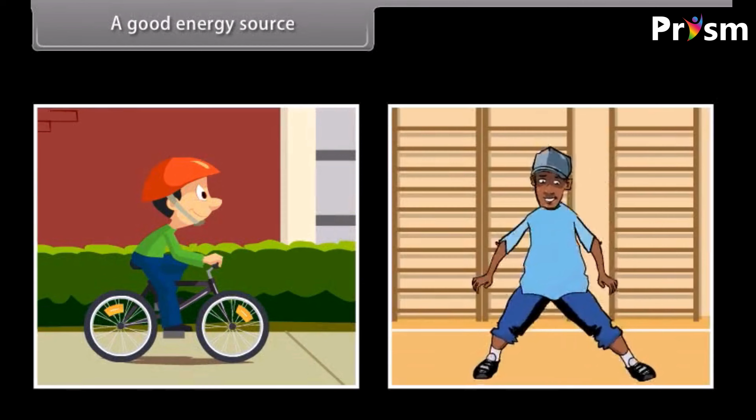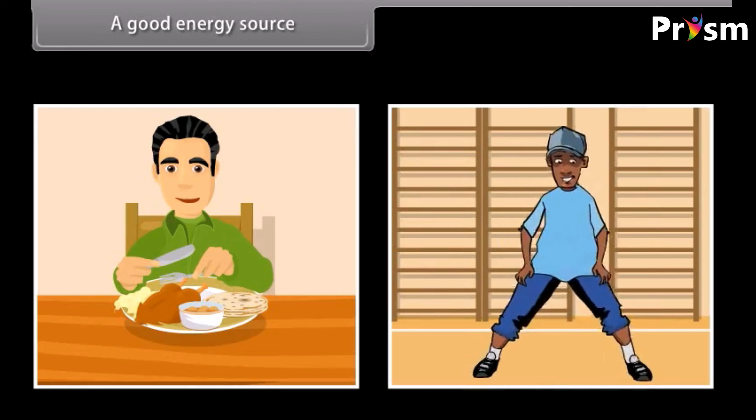A good energy source: in your day-to-day life, you need a lot of energy throughout the day. All physical activities that you perform require energy. This energy comes from a source that would give you the required energy to perform any activity. You need to keep in mind that any good energy source must assist you in performing a large volume of work, be easily available, be easy to store and move from one location to another, and be affordable.

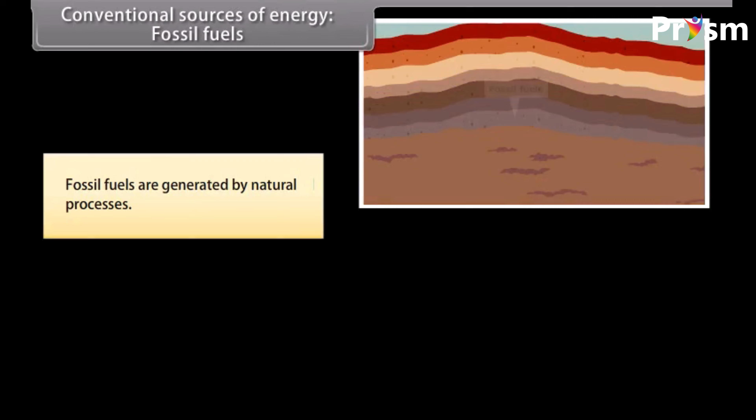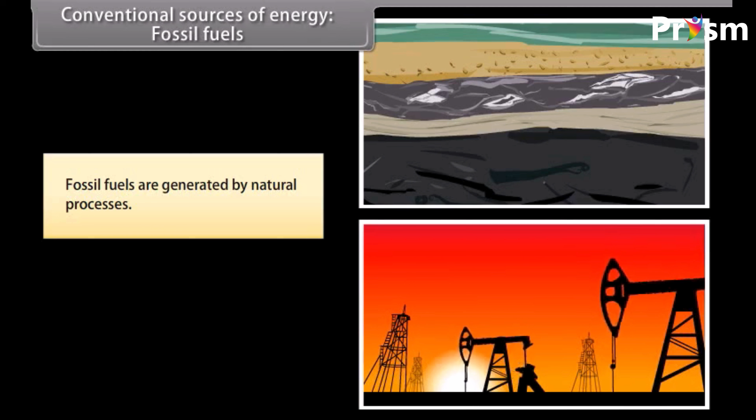Conventional sources of energy: fossil fuels. Fossil fuels are generated by natural processes. They include a high percentage of carbon. These are non-renewable sources of energy as they take millions of years to form. The reserves of these fuels are reducing at an alarming rate. The types of fossil fuels are coal, petroleum, natural gas, and heavy crude oil.

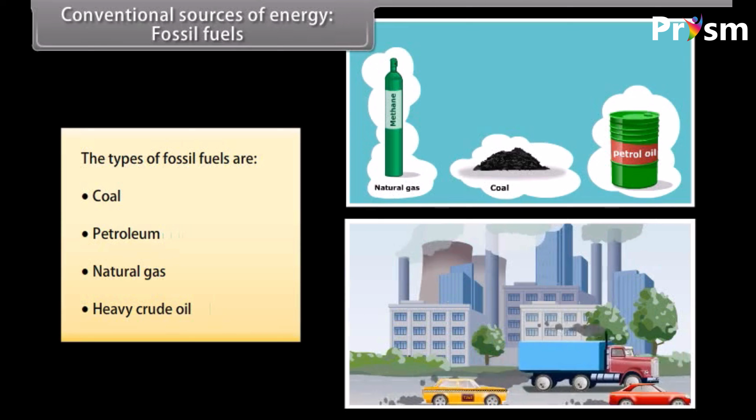Conventional sources of energy: thermal power plants. A thermal power plant is an industry where energy is generated by steam. Here, water is heated and then turned into steam. This in turn spins a steam turbine, driving an electrical generator. After it passes through the turbine, the steam is condensed in a condenser and recycled to where it was heated.

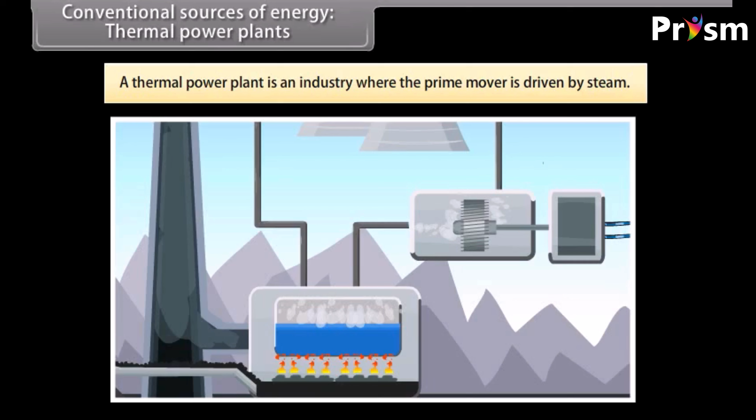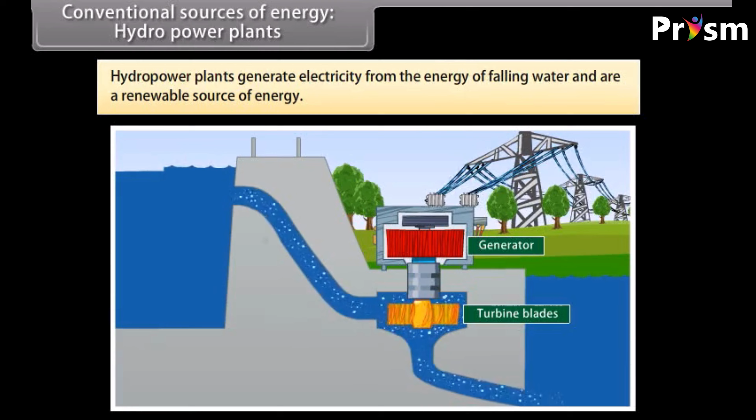Conventional sources of energy: hydropower plants. Hydropower plants generate electricity from the energy of falling water. Hydropower is a renewable source of energy. The advantages of hydroelectricity are: the cost of hydroelectricity is low, hydroelectric power supply is more suitable for industrial applications, and no carbon dioxide is produced as no fossil fuels are burnt.

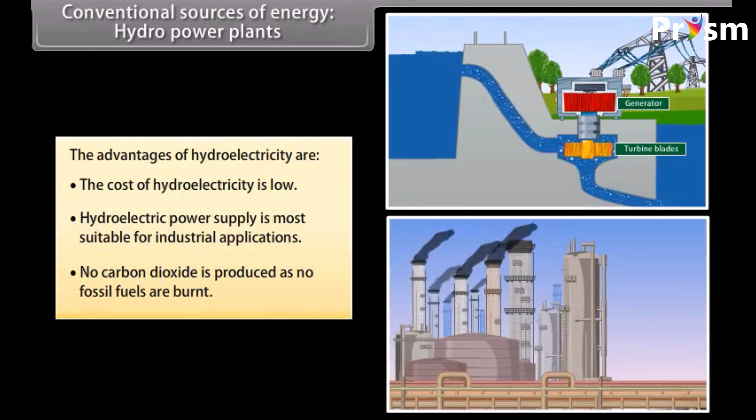Did you know? Burning fossil fuels generates around 21.3 billion tons, or 21.3 gigatons, of carbon dioxide (CO2) per year. Natural processes can only absorb about half of that amount. As you can see, there is a net increase of 10.65 billion tons of atmospheric carbon dioxide per year.

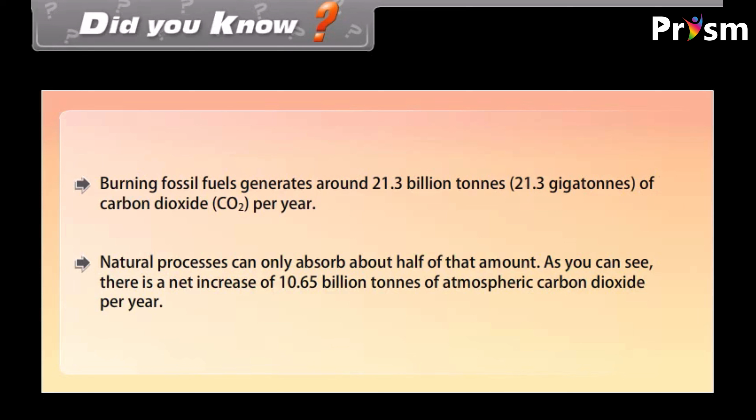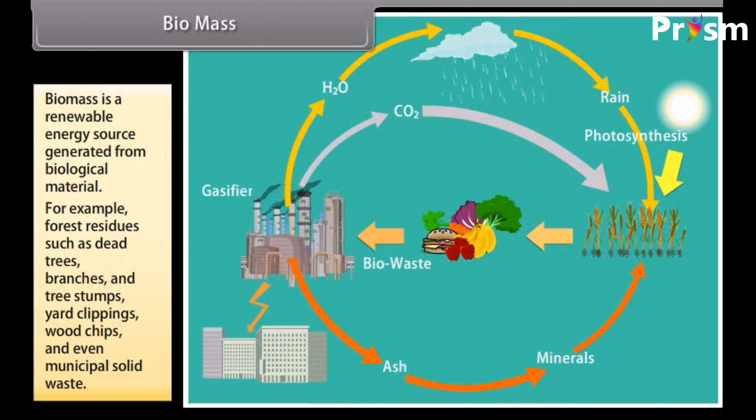Biomass is a renewable energy source and is generated from biological material that is derived from living or recently living organisms. As an energy source, it is either used directly or converted into other energy products such as biofuel. For example, forest residues such as dead trees, branches and tree stumps, yard clippings, wood chips, and even municipal solid waste. Biomass also includes plant or animal matter that can be converted into fibers or other industrial chemicals.

Wind energy: wind power is the conversion of wind energy into a useful form of energy, using wind turbines to make electricity, windmills for mechanical power, wind pumps for water pumping or drainage, or sails to propel ships.

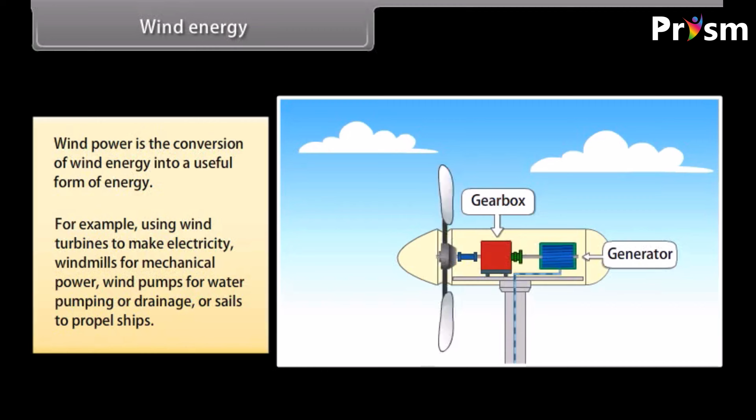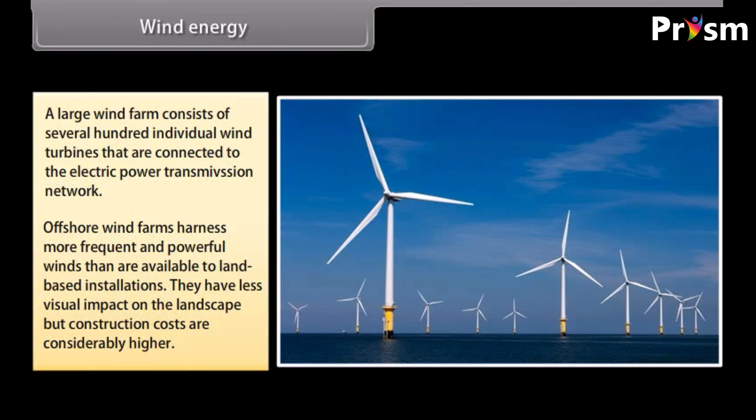A large wind farm consists of several hundred individual wind turbines connected to the electric power transmission network. Offshore wind farms harness more frequent and powerful winds than are available to land-based installations. They have less visual impact on the landscape, but construction costs are considerably higher. Small onshore wind facilities provide electricity to isolated locations, and utility companies increasingly buy back surplus electricity produced by small domestic wind turbines.

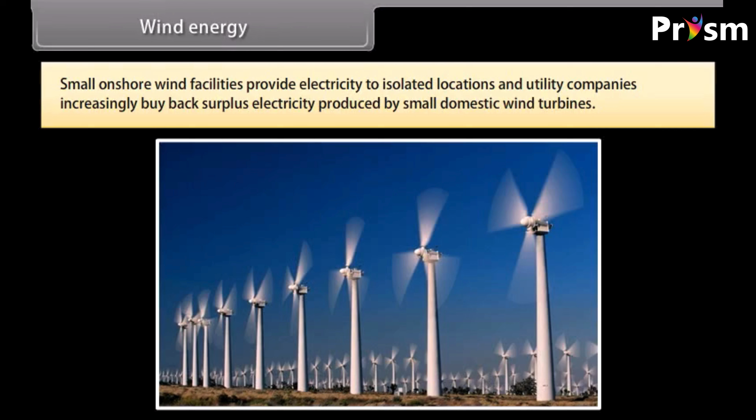Did you know? All large wind turbines have the same design: a horizontal axis wind turbine with an upwind rotor with 3 blades, attached to a nacelle on top of a tall tubular tower. In a wind farm, individual turbines are interconnected with a medium voltage power collection system and communications network. At a substation, this medium voltage electric current is increased in voltage with the transformer for connecting to the high voltage electric power transmission system.

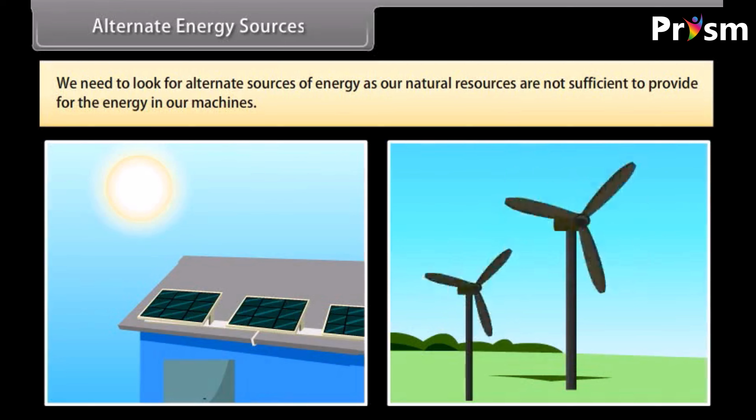Alternate energy sources: as we progressed, our day-to-day life activities also changed. We now get most of our work done by machines. Due to this, we need to look for alternate sources of energy, as our natural resources are not sufficient to provide for the energy in our machines. Examples include solar energy, energy from the sea, geothermal energy, and nuclear energy.

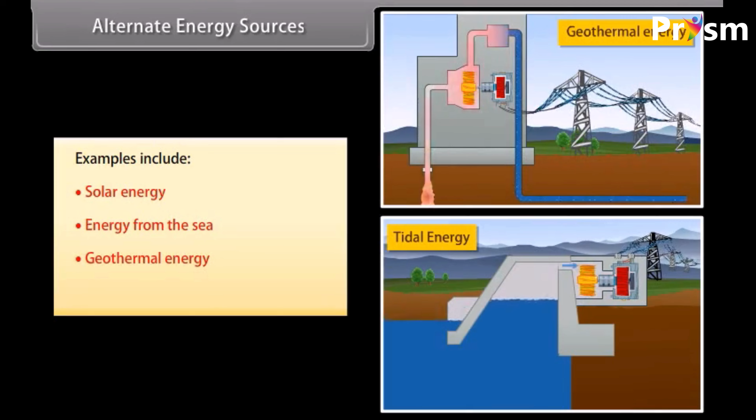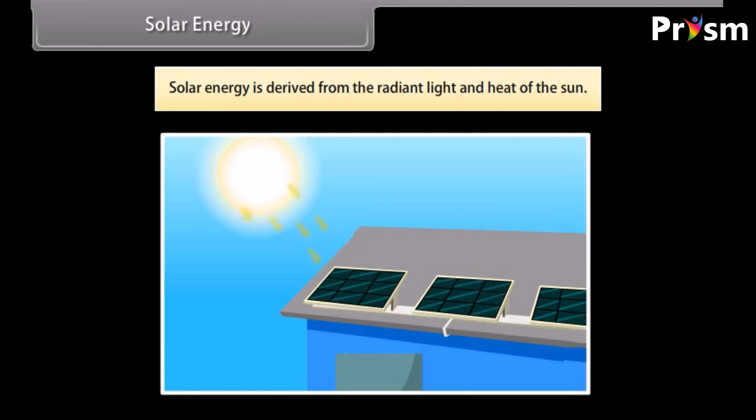Solar energy is derived from the radiant light and heat of the sun. It has been used by humans since ancient times for a range of technologies. Solar energy is used for architecture and urban buildings. It is also used for heating water in our day-to-day life, where solar hot water systems use sunlight to heat water.

In low geographical latitudes, domestic hot water usage is provided for with temperatures up to 60 degrees Celsius by solar heating systems. The most common types of solar water heaters are evacuated tube collectors and glazed flat plate collectors, generally used for domestic hot water, and unglazed plastic collectors used mainly to heat swimming pools.

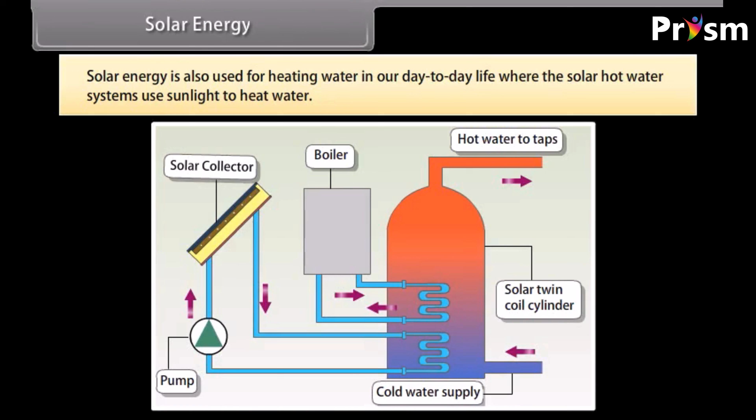Energy from the sea: tidal energy. Tidal energy is a form of hydropower that converts the energy of tides into electricity. This is a renewable source of energy, extracted from the oceanic tides.

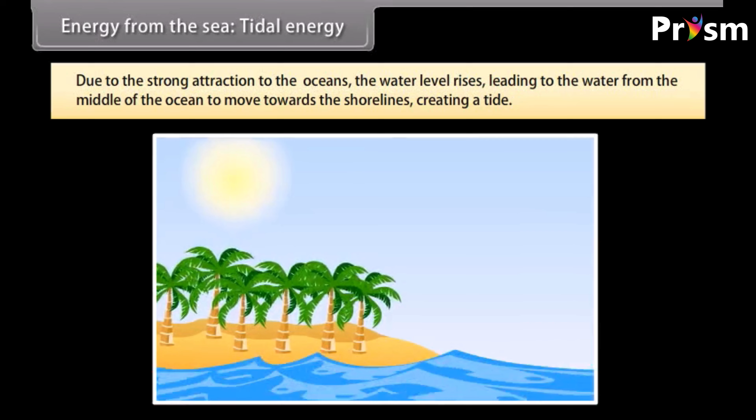Tidal forces are periodic variations in gravitational attraction exerted by the moon. This force creates motions or currents in the oceans. Due to the strong attraction to the oceans, the water level rises, leading the water from the middle of the ocean to move towards the shorelines, creating a tide. This is an unfailing occurrence due to the consistent pattern of the moon's orbit around the Earth.

The energy generated by the tide is saved by constructing a dam on a narrow opening to the sea. A turbine is then fixed at the opening of the dam that converts this tidal energy to electricity.

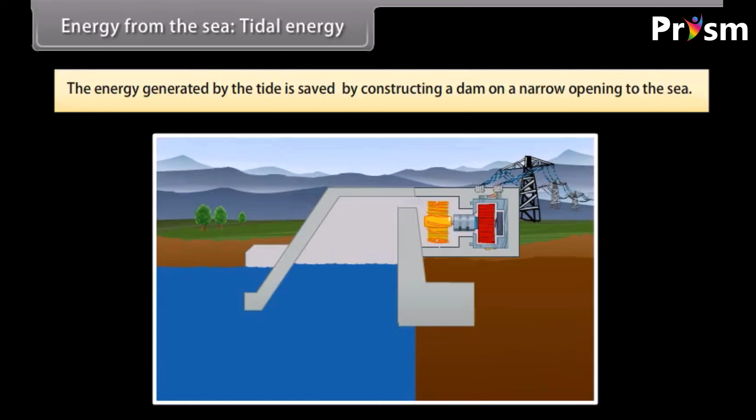Energy from the sea: wave energy. Wave energy is the generation of energy by oceanic waves. We can capture this energy to do useful work, for example electricity generation, water desalination, or the pumping of water into reservoirs. Waves are generated by wind passing over the surface of the ocean.

As long as the waves move slower than the wind speed above the waves, there is an energy transfer from the wind to the waves. Both air pressure differences between the upwind and the wave crest, as well as friction on the water surface by the wind, make the water undergo shear stress that causes the growth of the waves and in turn helps in generating wave energy.

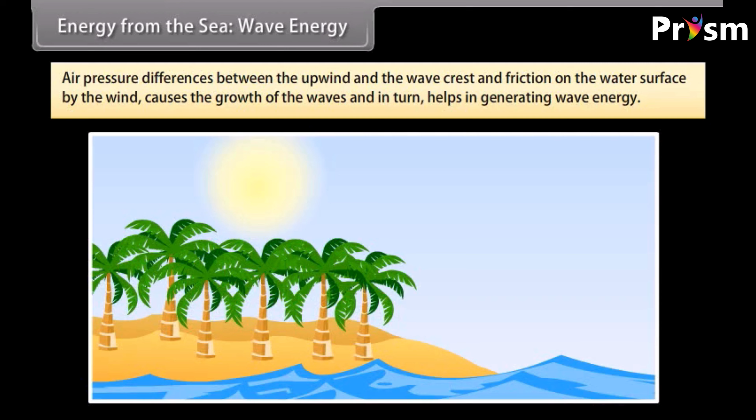Energy from the sea: ocean thermal energy. Ocean thermal energy uses the temperature difference between cooler deep surface and warmer shallow surface ocean waters to run a heat engine and produce a useful form of energy, mainly electricity. The heat engine gives greater efficiency and power when it is run with a large temperature difference.

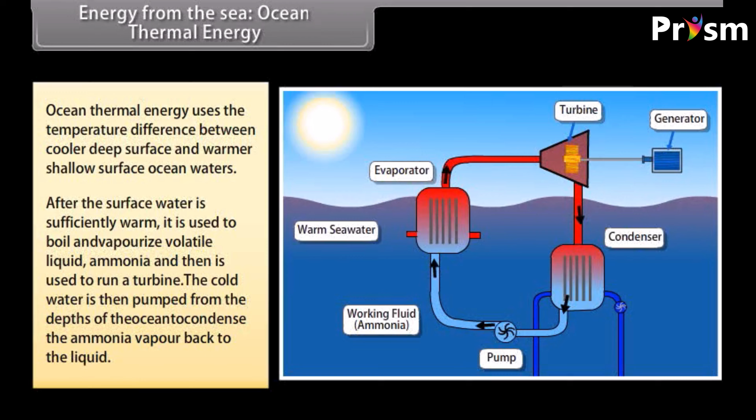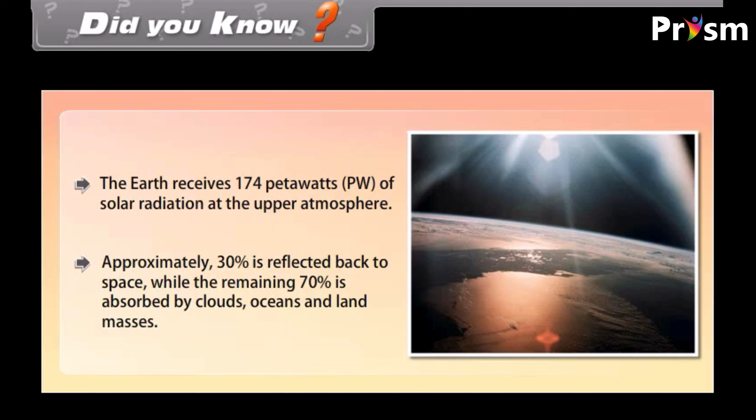Did you know? The Earth receives 174 petawatts of solar radiation at the upper atmosphere. Approximately 30% is reflected back to space, while the remaining 70% is absorbed by clouds, oceans, and land masses.

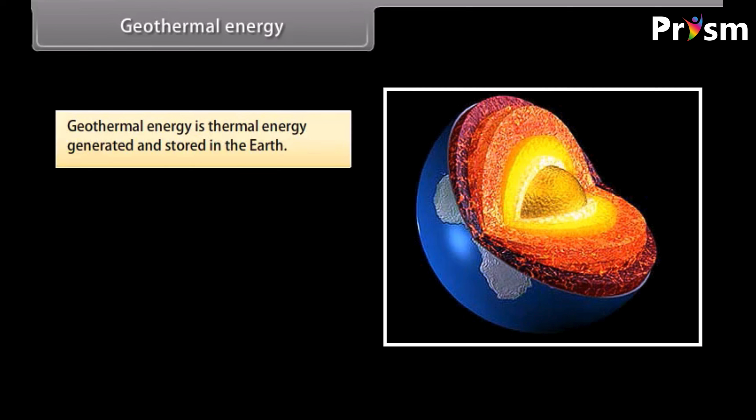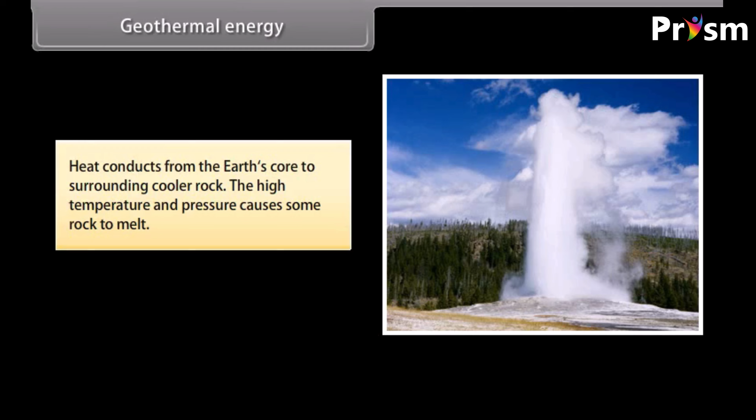Geothermal energy is thermal energy generated and stored in the earth. Molten rocks are formed in the deeper hot regions of Earth's crust. Heat conducts from the Earth's core to the surrounding cooler rock. The high temperature and pressure causes some rock to melt. This heats the rock and water in the crust, sometimes up to 370 degrees Celsius. Geothermal energy is used for hot springs and space heating.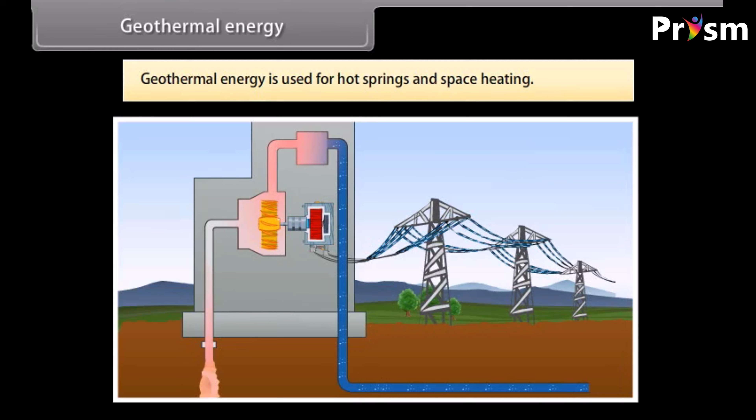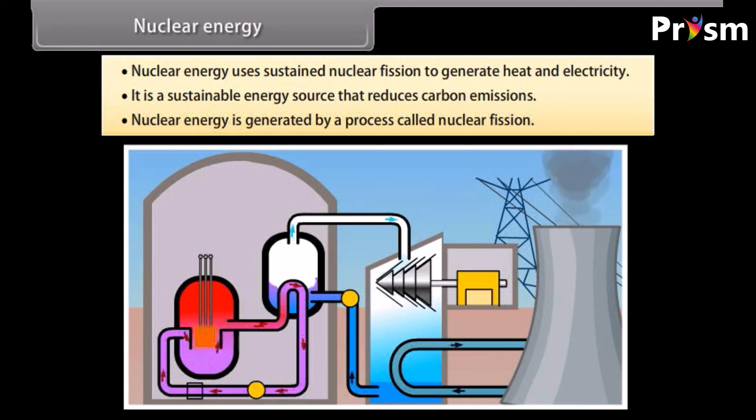Nuclear energy uses sustained nuclear fission to generate heat and electricity. It is a sustainable energy source that reduces carbon emissions. Nuclear energy is generated by a process called nuclear fission, in which the nucleus of heavy uranium, plutonium, or thorium is bombarded with low-energy neutrons. This atom is then split into lighter nuclei, and a tremendous amount of energy is released.

For example, the fission of an atom of uranium produces 10 million times the energy produced by the combustion of an atom of carbon from coal.

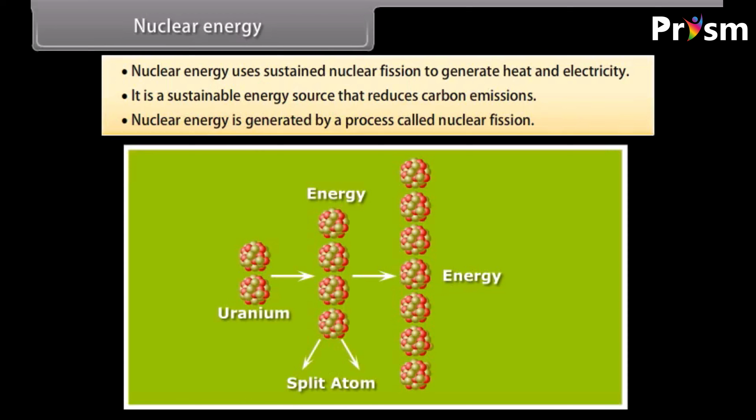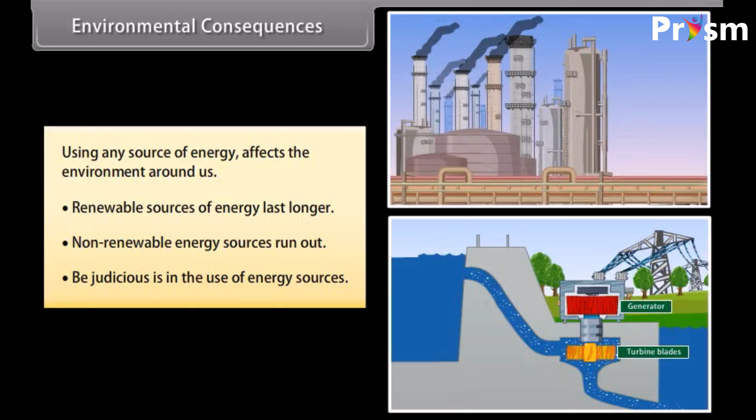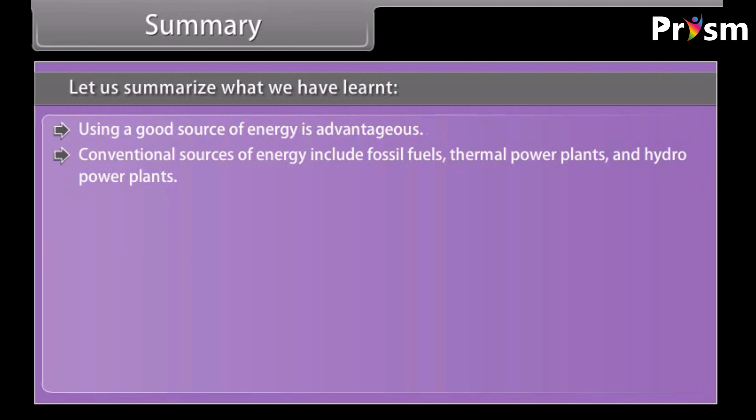Summary. Let us summarize what we have learnt. Using a good source of energy is advantageous. Conventional sources of energy include fossil fuels, thermal power plants, and hydropower plants. The conventional sources of energy improved with the use of biomass and wind energy.

Solar energy, energy from the sea, geothermal energy, and nuclear energy are all alternate sources of energy. Renewable sources of energy last for as long as they keep generating, whereas non-renewable energy runs out. We have to be judicious in our selection of energy, the purpose of the energy being used, and the actual usage of the energy, so as to avoid affecting the environment around us.